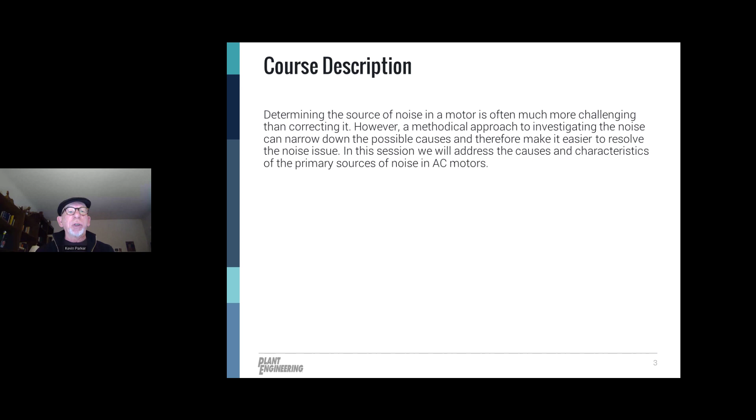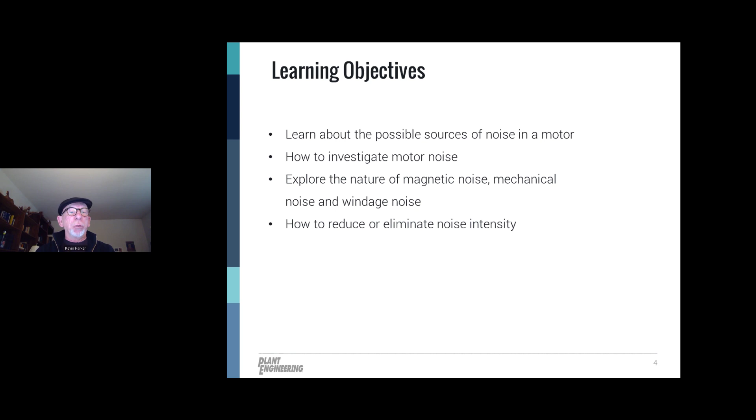Learning objectives today include possible sources of noise in a motor, how to investigate motor noise, the nature of magnetic noise, mechanical noise, and windage noise, and how to reduce or eliminate noise intensity.

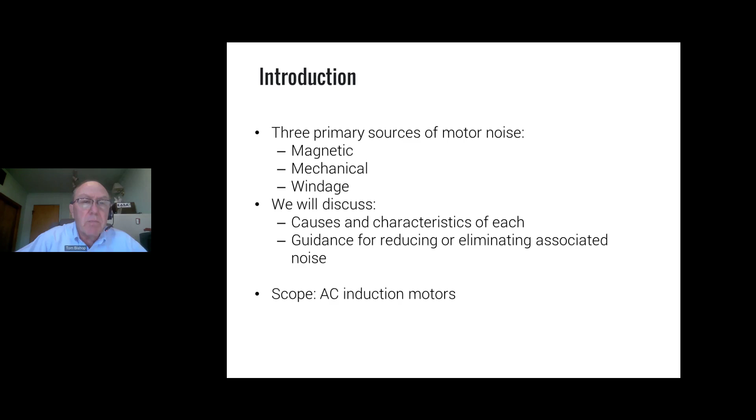And the scope, the motors that we're going to be discussing, the noise we're talking about will be squirrel cage AC induction motors. Magnetic noise is sometimes termed electromagnetic noise or electrical noise.

It's the result of mechanical forces that are electrical in nature, meaning that it's a pressure, it's like a push-pull or an attraction and repulsion of the different parts of the electric machine against each other, especially things like the thin metal discs that make up the stator laminations where the windings go in the motor.

So we've got all that series of stacked discs, and magnetic noise is when those discs can be moving against each other, one against the other, could even vibrate some of the wires in the winding. That's our push-pulling or attraction and repulsion due to the alternating magnetic field. That's our alternating current, where through each cycle we've got a positive half of a cycle and a negative half of a cycle.

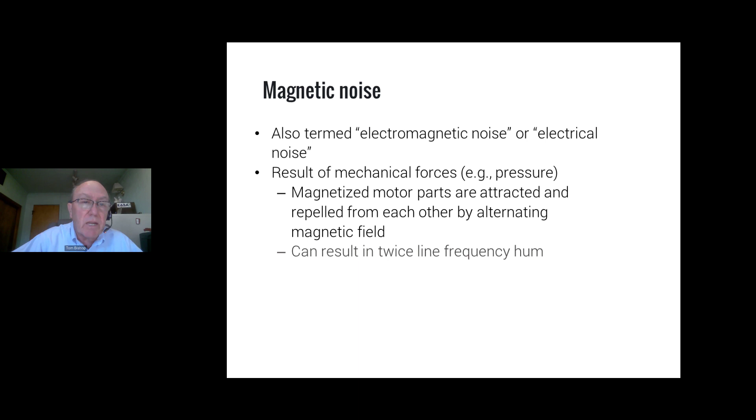And as a result of this, we can get what's called twice line frequency hum. So if our line frequency, typical here in North America, is 60 hertz, that's 60 cycles per second, twice line frequency would be 120 hertz, 120 cycles per second. And a common type of apparatus that we hear that type of noise from all the time is a transformer.

The magnetic noise in itself, as part of the motors we're talking about, is typically the second highest noise source for 2- and 4-pole motors, with windage being the first for those higher speed machines. Higher speed, what I mean by that is that a 2-pole motor, the synchronous speed, the magnetic field revolves at 3,600 revolutions per minute or cycles per minute. 4-pole would be 1,800. It goes in proportion.

There's always a north and a south, so we always have an even number of poles, pole pairs. So 2-pole, 3,600, 4-pole, 1,800. Slower machines, 6-pole, 1,200. It goes on like that. So that's our higher speed machines. We tend to find more occurrences of magnetic noise being troublesome, with windage being probably the most troublesome. And as we go down in lower speed machines, the magnetic noise starts to become the dominant source.

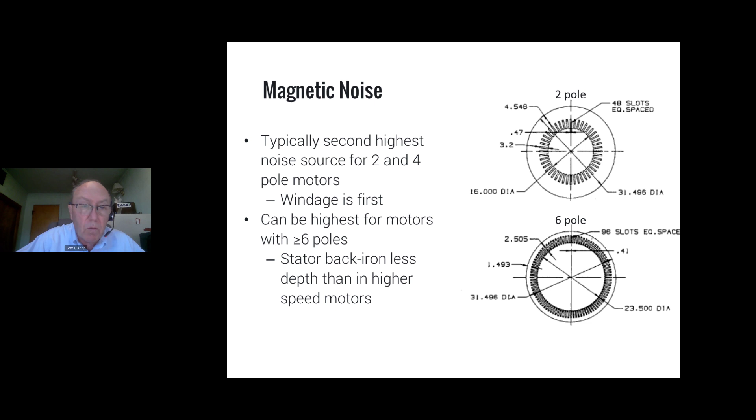If that main source for the noise is magnetic, then what we also find is that the overall noise increases when we apply load to the motor. So at lower levels of load or no load, we've got one level of noise, and as we increase the load, the noise level starts to increase. Also, as a sidebar comment, if the source is magnetic and we de-energize the motor, in other words, take away that electrical source, the noise instantly goes away. That's a characteristic of magnetic noise.

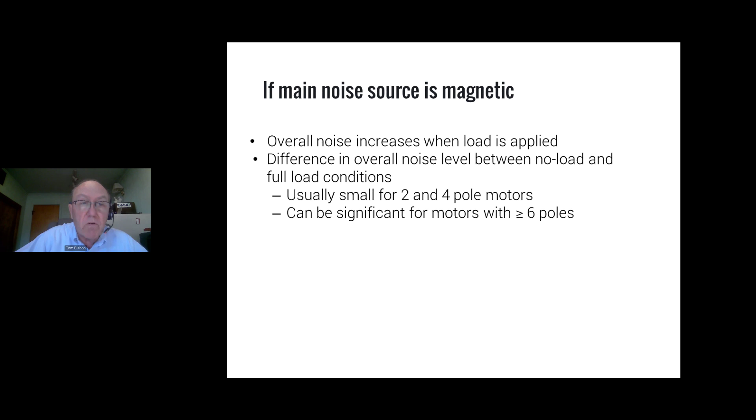So we've got this noise, it does increase. The amount that it increases is smaller for a 2 or a 4-pole motor, and much greater for motors with 6 or more poles. And this is illustrated in this table that comes from IEC, the International Electrotechnical Commission. It's an international standard, 60034-9, which is related to noise and rotating electrical machines.

And we see we've got rated output power here, and disregarding the numbers, just noticing that we go from 1 to 2200 and over, we've got the lower power ratings towards the top, higher power ratings towards the bottom. And now if we look at 2-pole, 4-pole, 6-pole, 8-pole, the 2-pole is just a nominal change, about 2 dBA, 2 decibels. And as we go to lower speeds, higher count of poles, take this one here, 11 kW to 37 kW, we go from 2 up to 7 when we're at 8-pole.

And to explain this in North American terms, we go by horsepower. So 1 kW is a little bit over 1 horsepower, 11 kW is 15 horsepower, 37 kW is 50 horsepower, 110 kW is 150 horsepower, 400 kW is a little over 500 horsepower, and 2200 kW is about 3,000 horsepower. So it covers the full range from basically any integral horsepower motor up to an unlimited size.

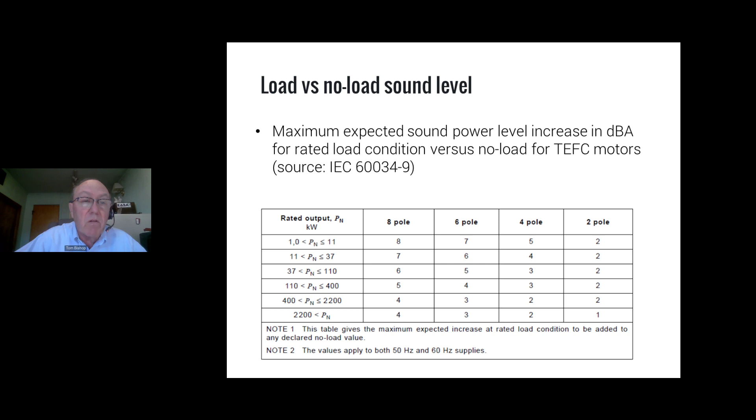The design of the motor and its impact on noise. So the motor designer is planning to create a motor, and some of their considerations reflect back on noise. If we use the largest possible air gap, that can reduce magnetic noise.

But if we use a larger air gap, what happens is we're driving that magnetic field, magnetic flux, the lines of magnetic intensity through that air gap, that airspace. The bigger the space, the more energy it's going to take. What it's related to is the amps, the current that the motor's going to draw. It's going to draw more current at no load and with load because the air gap is larger.

And because of that, with higher amps for the same amount of power, we've got a lower power factor. Also at no load, we're going to have higher no load current. So those are potential drawbacks there, especially if the utility is going to impose a power factor penalty. So a way around this, what can the designer do?

They could use a longer core to decrease the air gap flux density. In other words, let's say the design called for a 10-inch core and they had to use too large of an air gap, maybe they'll go to an 11-inch core with a smaller air gap and lower air gap flux density.

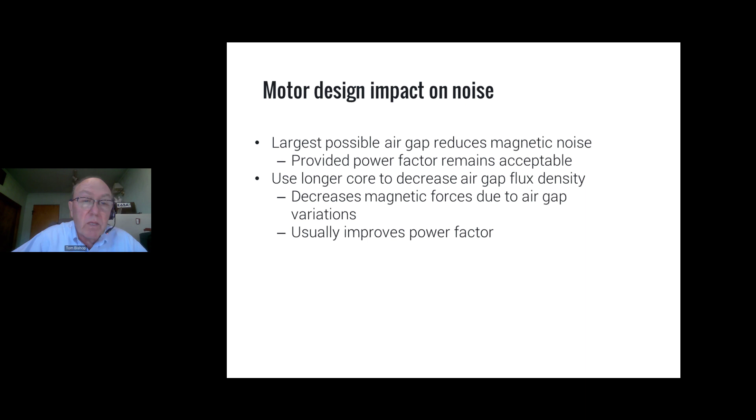So that's our trade-off. So the challenge for the motor designer is to come up with something that uses the largest possible air gap with really the longest possible core.

Slip noise relates to the difference in speed between the operating speed of the motor and either synchronous speed of the motor or line frequency relationships. If we've got a motor that's synchronous speed 4-pole 1800 RPM and its full load speed is 1740 RPM, 1740 from 1800 is 60 cycles per minute, or 1 cycle per second, which is 1 hertz. That would be our slip noise.

The frequency of the slip noise is what we call a beat frequency, and that beat frequency is typically twice the slip frequency. So if we had 1 hertz slip, 60 CPM, we're going to get 2 hertz, twice that, for our slip noise. And because it is low frequency, it's going to tend to come and go over a noticeable period of time.

This coming and going, this constantly changing, gradually back and forth, is more annoying to a lot of people than something like the transformer type hum, the twice line frequency noise. So that can make it an objectionable noise source, even if it's not very great in amplitude.

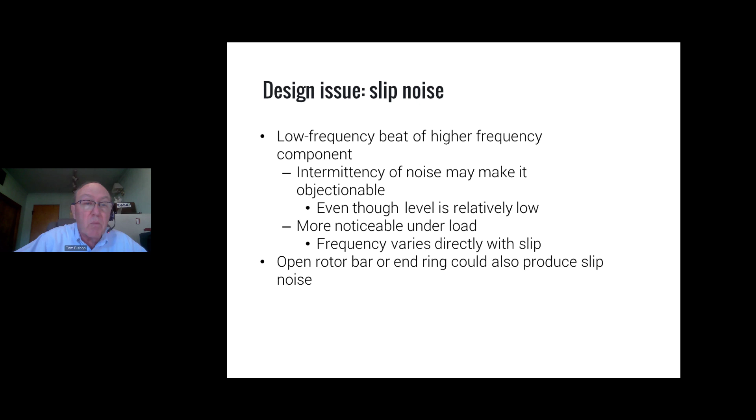Other things that can cause this, an open rotor bar or an end ring that's fractured, could also produce slip noise. But again, slip noise in itself is an inherent part of the motor, simply because it's going to have slip, and the lower the load, the lower the slip frequency is going to be, the less noticeable, but it's more objectionable as that frequency starts to increase.

And when the designer tries to figure out how much of an angle do we need in this particular motor, there's no set rule on what value is the correct value or what works best. But generally speaking, it's between 1 stator slot distance and 1 rotor slot distance, usually whichever results in the larger number. So if we had a 48 slot stator and a 30 slot rotor, with 30 slots, the space between the rotor bars is larger. The skew would probably be about 1 rotor bar from one end to the other.

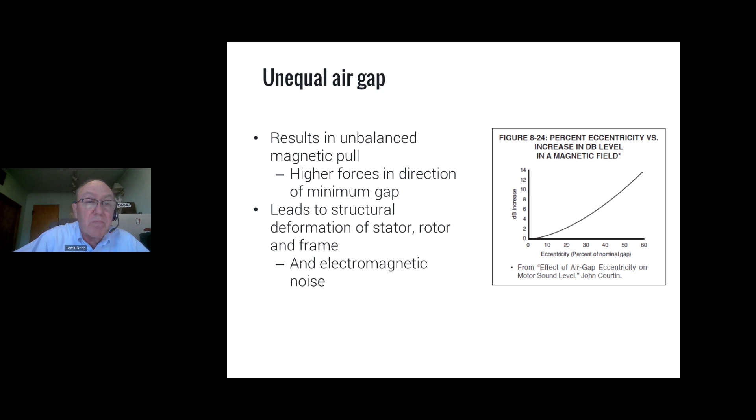Things that cause the air gap to become unequal. We could have an eccentric rotor. In other words, we put the rotor on the shaft, the rotor core should be a circle, and its dead center should lie within the center of the shaft. If it's offset, it becomes somewhat like an egg shape or a cam action, like a camshaft. It becomes eccentric every time it goes around. If we looked at the air gap in one place relative to the stator, it would constantly change because of rotor eccentricity.

Similarly, we could have the stator bore being eccentric, or what we might call egg-shaped. And now the rotor, when it's spinning, even if the rotor's dead center, it still has more air gap on one side of the stator than another side because the stator bore is not concentric all the way around.

A bent shaft: if the shaft supporting the rotor is bent, the rotor follows that bend, and now it kind of sweeps around, and we've got a bow in the rotor that moves around. We have a constantly changing air gap, so we've got that unbalanced magnetic force constantly changing, trying to vibrate the motor, and it also induces some electrical currents that vary, and the greater it is, the more electrical noise we hear from that machine.

Shaft journals could be machined out of concentricity, which, going back to an eccentric rotor, may be why: even though the rotor is concentric to the shaft that it's mounted on, the shaft that it's mounted on is not concentric to the shaft journals, therefore the rotor becomes eccentric.

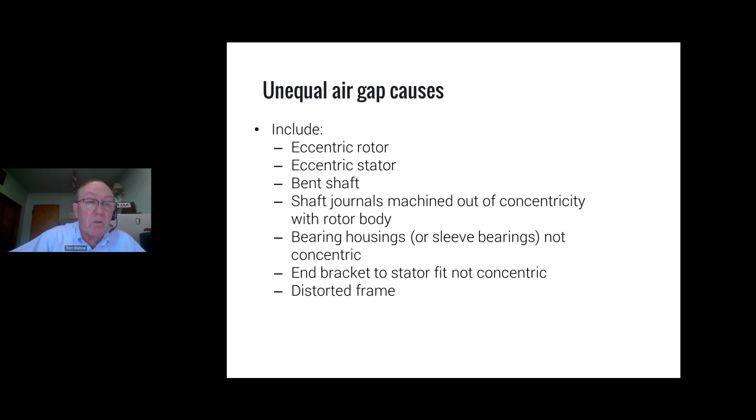Mechanical noise, moving over from magnetic into mechanical issues. Strictly speaking, all noise is mechanical in origin. The noise that we hear, even with a magnetic source, comes out to what we hear with our ears as mechanical; something mechanically gets excited by it, changes by it. And that's related to pressure waves being transmitted through air or any other fluid, gas, liquids, and solid material. So we've got sound moving through all the different materials.

It could be the air flowing through the motor. Not usually liquids in motors to a great degree, sometimes oil for oil lubricated machines, but solid materials: the winding, the laminations, the rotor with its bars and end rings, bearings even, the shaft. All these materials are carrying the noise from inside the motor externally to where we hear them as a mechanical sound. And it's produced when these magnetic materials are attracted and repelled from each other. So we still have a magnetic source from this alternating magnetic field, but we're getting mechanical sounds. Maybe the electrical source excites something like an air deflector.

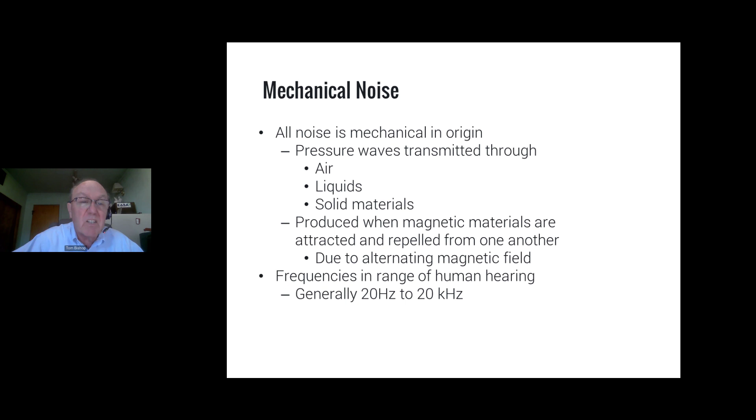The range of human hearing goes from about 20 hertz to about 20 kilohertz. The higher the frequency, usually the more objectionable they are to the human ear. But that's our range for mechanical noise.

An example of mechanical noise is from a loose stator core, where the stator laminations, the thin discs that hold the windings in, go inside of a frame. The example here is a rolled steel frame, so you have something like a steel shell, kind of like a big can. The core is in there and it's not tight. We'd characterize the noise as a buzzing sound.

A way that we can confirm that this sound is induced by a loose fit of the stator core in that frame is taking something like a dead blow mallet and tapping on the outside of the frame, the shell of the motor, while the motor's running. If the noise from the motor changes while we're tapping, that's an indication that the stator core is loose within that rolled steel frame. And at times, we might even be able to get that noise to cease.

So a potential corrective measure would be to tap on it with the dead blow mallet and reduce the noise to the point where it's either acceptably low or possibly even goes away. That said, over time it may come back, because the inherent root cause is that the stator core is loose in the frame and it could loosen up again over time.

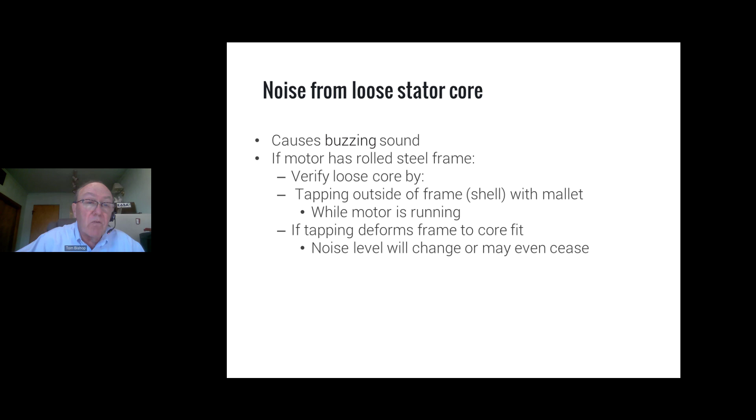A physical rub can generate noise. We have examples here. We've got damaged or worn bearings. So how do we correct that? Simple approach, replace the noisy bearing. If we have external fan contact with the cover or an internal fan contacting an air deflector, what we want to do is ensure that the fans are properly located. In other words, move them away from making physical contact with a cover or an air deflector. Relocate the fans.

Also, rotor contact with stator. Make sure that the rotor stator concentricity is within tolerance, within that plus or minus 10% from the average. And if there has been physical contact, in all probability, if the rotor has made contact with the stator, the motor would need to be dismantled and some repair work done so that this can all be corrected, because probably what's also happened is either the shaft is bent or the bearings are destroyed. So it would involve more intensive repair work, but that's the noise from rubbing.

Again, that's kind of the, I don't want to call it worst case, but this is certainly more challenging to deal with a stator rotor contact than it would be from just noisy bearings or fans that are contacting an air deflector or a cover.

Bearing noise, excessive noise from the bearings can be caused by things like non-uniform balls or rollers, where the balls or rollers are no longer true spherical shapes. There's some out of roundness to them, or they've got indentations in them, or they've been scuffed up, poor surface finish, leading to degradation there. So that gives us noise from the bearings. Essentially, when we have these conditions, non-uniform balls or rollers, or poor surface finish, the bearing is already in a failure mode that we're not going to be able to correct by doing something like cleaning the lubricant, flushing it out. The bearings with that kind of noise level need to be replaced.

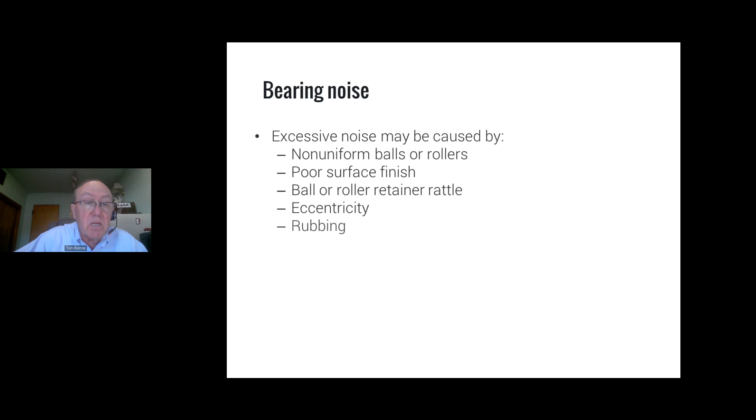The bearing noise, the result is that it's impact noise or resonance excitation. What the bearing noise does beyond the bearing is it excites something else. That noise travels through other parts, through the air, especially through metal, and now we get this noise that impacts on bearing housings and air deflectors or any other part that's efficient at radiating noise, and we create a resonant condition. One of the things that's particularly prone to this is air deflectors, because many times they're just a piece of stamped sheet steel, so they lend themselves to becoming a noise source. They're almost like a musical instrument sometimes.

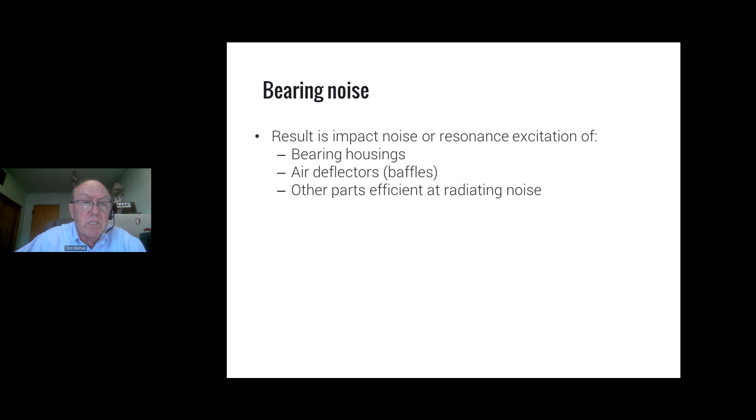Identifying the bearing noise. Some things that can cause the noise. If we have what's called brinelling, we get a low-pitched sound, maybe kind of like a rumble. Brinelling is impact damage on a bearing that results from the hard contact of the balls or rollers against the raceway. It's a sharp indentation into the bearing. For example, if we took a motor and we dropped it and the balls indented into the raceway, those indentation marks are called Brinell marks.

So that's that kind of an indentation mark. It doesn't have to be that pronounced, but that's what we call Brinelling, low-pitched noise. There might be dirt in the bearings, some contaminant that gets in the grease and into the bearings, the rollers, the balls, the raceway, and so forth. Gives us a shrill or kind of like a shrieking sound. Very objectionable, harsh on your ears. It's the kind of noise you just don't want to hear. If you had that, you'd probably almost want to shut that motor right down. So dirt in the bearings can do that.

We might get an intermittent crackle sound. And that can be due to the grease that's being used. It might have to do with the grease viscosity. It might also have to do with how much grease is in the bearing. Maybe we have too much grease in the bearing, and now it's not giving us a smooth lubrication process.

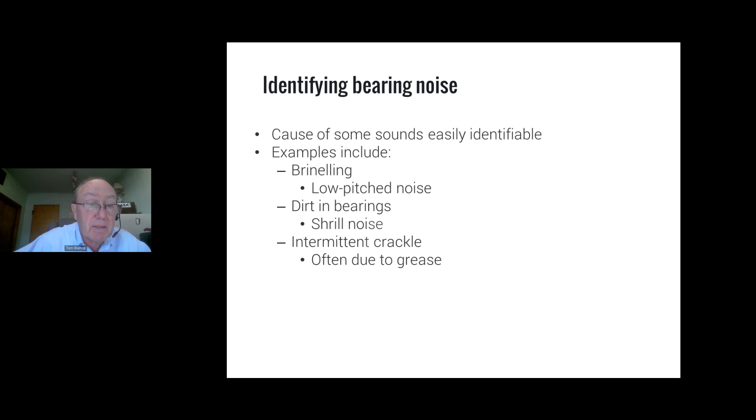How do we reduce bearing noise? There's a simple way; we go back towards design of the motor. The manufacturer, when they're doing the design, they say, okay, what can we do to reduce the noise in this bearing assembly, in this motor? We need to do this before. We don't want to build the motor and find out it's noisy. If we're building 1 million motors a year, we want to have something that's part of our process that says we're not going to get bearing noise from these motors, or at least reduce the possibility.

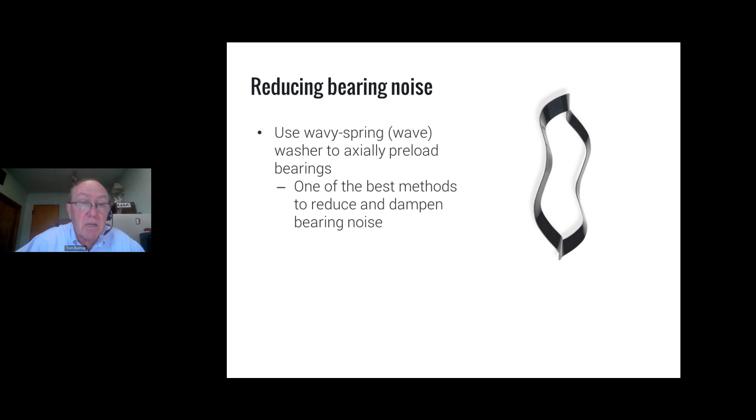And a good way to do that is to use what we call a wavy spring or wave washer to axially preload the bearings. We see here's this wavy washer. It's flexible, it's bendable, so it can be compressed. It preloads the bearing, and the way it's doing it is it's up against the outer race of the bearing. The end of the motor, if you look at it here, this is a totally enclosed fan-cooled motor. We're at the opposite drive end.

Normally on a motor, most common, we find that the drive end bearing is locked. The outer race is locked, the inner race is locked, it's fixed. This bearing at this end and the shaft are free to move so that when the motor heats up, the shaft gets hotter and expands more than the rest of the frame. So this bearing is going to get pushed towards the fan. As that expansion occurs, we need a place for the bearing to be able to expand, and that wave washer is filling in part of, not all of, that space, so that when the motor shaft expands, it starts preloading. The wave washer preload force acts against the bearing and causes each ball to follow the same path on each bearing.

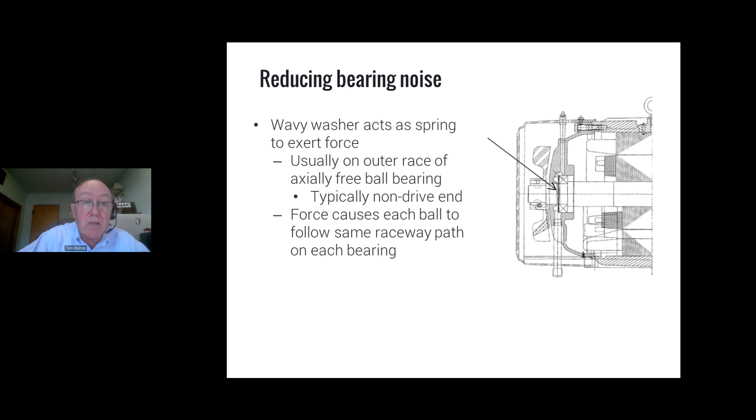And that's another benefit of this arrangement: not only does it preload the opposite drive end bearing, it also preloads the drive end bearing because it's pushing the bearings against each other axially. And now, everything being concentric, the balls or rollers are going to ride the same race all the way around every time because of that preload. So that preloading decreases the noise due to the balls rattling. In other words, they're not stable, and it decreases the high frequency vibration that would have occurred if the bearings weren't stable. And it can improve dynamic balance by removing some bearing looseness, since the bearings are preloaded against each other. They're not slopping back and forth.

If it was something like a vertical motor, some type of preloading, maybe not a wave washer, but some type of spring loading on the bearings can help preload the bearings, even an intended thrust load. It improves dynamic balance by removing the bearing looseness and allowing the bearing to ride in the center. It keeps the rotor centered in the air gap.

If we have too much bearing preload... if one wavy washer is good, would two wavy washers be better? The answer is no. If we have too much preload, instead of a high frequency vibration, we're going to get a low frequency noise. And because the preload is too great, we can overheat the bearings. We can mechanically overload the bearings, reducing the bearing life.

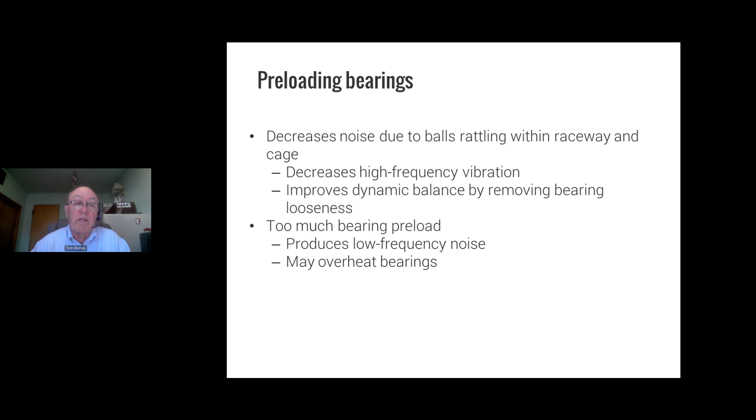Friction noise is due to insufficient lubrication between two sliding surfaces. So if we don't have enough grease in the bearing, we get noise from that due to high impact vibration from the rapid intermittent contacting of surfaces, so that there's smearing or skidding as the rollers or balls are making contact with the surface. So we need that lubricant to keep everything moving smoothly.

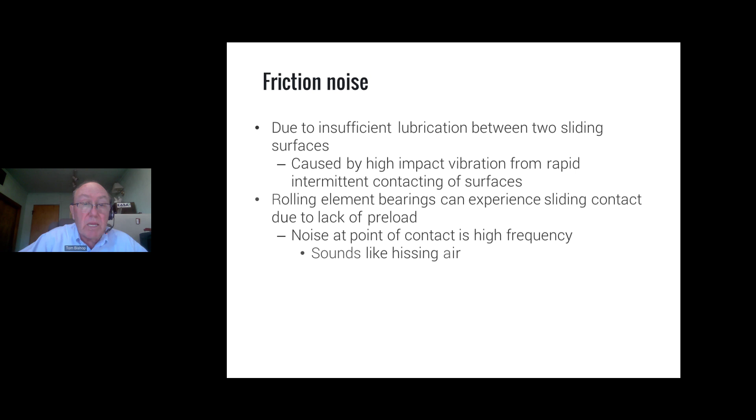When the rolling element bearings don't have enough preload, that can also lead to this sliding action. So again, that preloading helps keep the bearings, balls or rollers in uniform contact with the races as the machine rotates, as the rotor spins around. And when we don't have good contact, we can get a sound like hissing air. So that's a characteristic there.

Airborne noise: any structural part can become a source for airborne noise if it's excited with sufficient energy at its natural frequency. Again, I go back to something like an air deflector, because they're so prone to airborne noise, creating a resonant condition that sets the part into motion. It sets the air around the part into motion. How can we deal with that? Well, we can use noise deadening or damping materials to reduce that noise level, that sound level.

And if it's something like an air deflector or drip cover, whether it's totally enclosed fan-cooled or a drip-proof motor, a good fix for that air deflector to reduce noise is a damping material, an RTV silicone sealant between the air deflector and the end bracket that it mounts up against, so that RTV material acts as a damper and then reduces that noise and often eliminates it.

If we've got a drip cover or something like that, another way around that, we look at, can we put sound deadening material on top of that cover, around it, surround it. The way the sound absorbing material works: the denser it is, the thicker it is, the less porous, the heavier it is, the less noise we get. So it's got more dampening qualities.

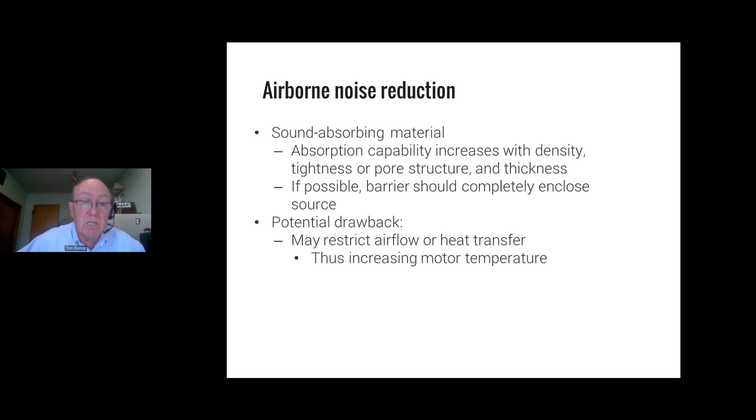The potential drawback: if we totally enclose the motor, encase it in a sound deadening material, the motor's going to run quiet, but not for very long because it needs cooling air to move through it. So by restricting the cooling air transfer through the machine, now what we get is much increased temperature, and then the winding and the bearing and lubricant life is significantly reduced.

So we've talked about magnetic noise, we've talked about mechanical noise, and now we have windage noise, which accounts for the majority of the motor noise that we find within motors. Most common in 2- and 4-pole motors, not quite as dominant in 6-pole and slower. As the speed goes down, windage is less and less of a factor. What is it caused by? Obstructions near rotating parts that move air and create turbulence.

So if the fan is too close to something, if there's something that sticks out, maybe there's a bolt or even a grease fitting that's too close to the fan, a grease pipe, we get turbulence, we get noise from that. The type of noise we get is what we call broadband. An example of broadband noise would be what we call white noise. So it's a wide range of frequencies. It's not any one specific frequency in most cases.

How do we reduce the windage noise? Minimize the obstructions to the cooling airflow paths. Get the fan away from being too close to something like a grease fitting or too close to the fan cover. If it's a large open enclosure motor, we might consider, if we reduce the cooling fan diameter on that motor, what will that do for the noise? It won't significantly reduce the noise.

Most of the noise in our open enclosure larger motors comes from rotor bar fan action. There's vent ducts in the rotor, and those vent ducts where the air moves past the bars, that's where we get our rotor noise. So it's not from the cooling fans or the fins, but it's from the rotor bars.

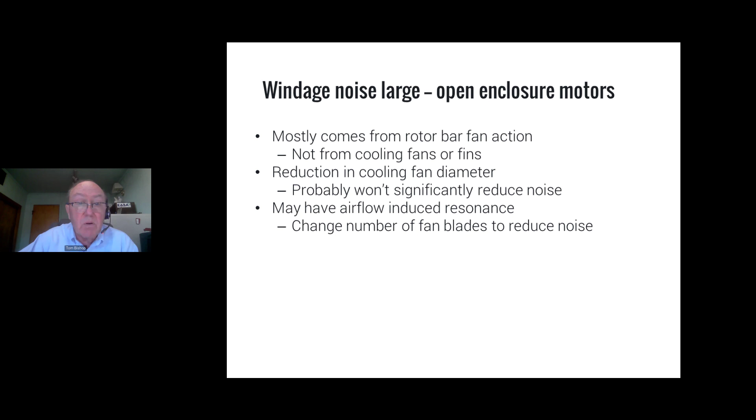And that airflow can induce resonance. One way that we can correct for that, as a designer, is to change the number of fan blades to reduce the noise. So that's a designer's option.

Other things: large open enclosure motors, radial vent ducts through the rotor and stator can produce pure tone, not broadband, but pure tone, highly irritating, frequency typically above 1,000 hertz, often termed a siren effect. And the way the designer can reduce that type of noise in the design stage is to offset the number of the rotor ducts with respect to the stator ducts.

So axially speaking, we've got slots in the rotor that don't line up with the equivalent slots in the stator. They're offset from each other. So it goes into the air gap, moves across the air gap a little from the rotor and then through the stator, as opposed to going straight from the rotor right on through to the stator. If it went straight through from rotor to stator, we might get this siren effect noise. By offsetting it, we get a large reduction in noise.

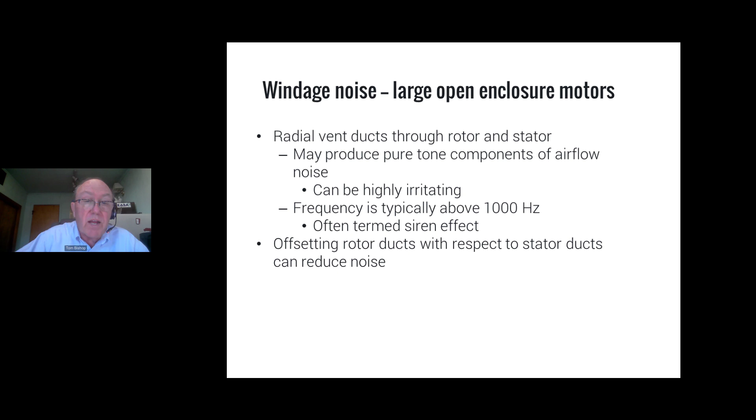The designer has to be the one to do this, though, because we do have a reduction in airflow by virtue of the fact that we've offset those ducts from each other. On totally enclosed fan-cooled motors, external fan diameter reduction is very effective at reducing noise. We said on those large open motors it wasn't, but on these it is.

However, the reduction in that diameter reduces the airflow. And if we reduce the airflow, we're going to reduce winding, lubricant, and bearing life because we're going to increase temperature. So a way to reduce fan blade frequency noise would be to increase the clearance between the fan and stationary parts, as we did with the other machines, and also, again in the design stage, using non-symmetrical spacing of fan blades. Maybe we have a fan with, let's say, 12 blades.

So instead of spacing the 12 blades like the hours on a clock, we change them so they're no longer at hours-of-the-clock spacing. And that intentional non-symmetrical layout helps reduce the noise. Okay, with that, we've covered the magnetic, mechanical, and windage noise sources and potential solutions. So moving on to the next part here.